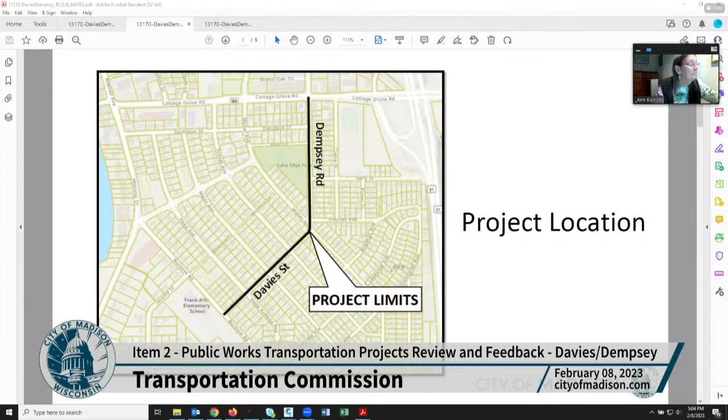Hello, everyone. I will go ahead and share my screen. Can you confirm you see my screen? All right, we do. Hello, everyone. My name is Aaron Canton. I'm a designer with the Streets and Paths section in engineering.

Today I am looking for your review and feedback for the Davies Street Dempsey Road reconstruction project that City Engineering has planned for this summer, 2023. The project is on the east side of town. You can see here the project limits on Davies Street from Buckeye Road to Maher Avenue, and then Dempsey picking up from there, from Maher to Cottage Grove Road. This is a rural to urban project. It is a full clean slate. You can see some existing images of Davies and Dempsey here.

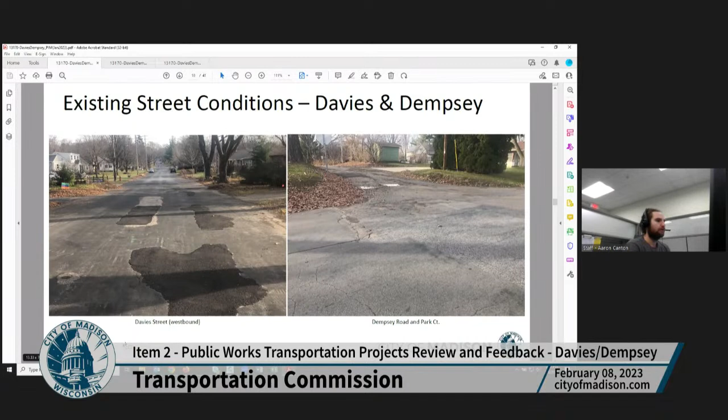Existing width is between 32 and 36 feet. Pavement's in pretty rough shape, just pavement and grass, no curb and gutter, no sidewalk throughout. This project has been in the planning mode for a few years now, I think probably about 3 years. There's been public meetings going back to 2020. We had feedback from previous meetings and had a direction forward for a proposed design, which we brought to the public just a couple weeks ago. We had some really good feedback there, and today we're presenting to the commission.

So first off, as is now a common thing for these types of projects, we have the approved complete green streets guidelines to guide some of the decision making. Just a little background on Dempsey Road and Davies Street: it's classified in the CGS guideline as a neighborhood street, meaning a little different than neighborhood yield street, because we need two travel lanes where two drivers can pass without needing to stop.

This is a transit route. It is today and will continue to be so with the metro redesign. So we definitely need to make sure that we accommodate buses well throughout.

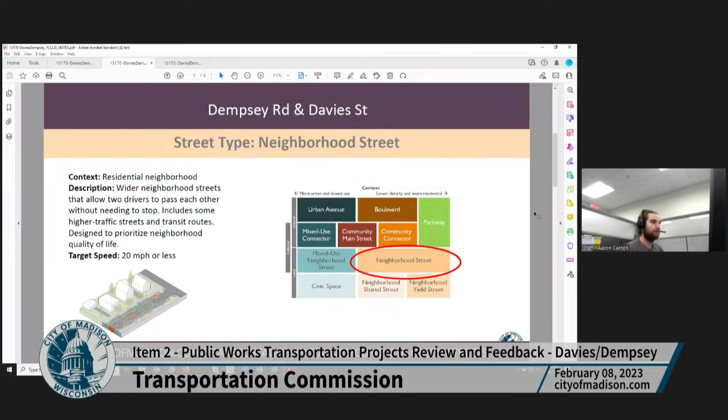One of the main overlays from the CGS guidelines that impacts this project is that a majority of Davies Street and Dempsey is on the all ages and ability bike network, as a large part of it is on the Monona Lake Loop. So we need to make sure that we have a safe, low stress bike option on this street that ties in well with the rest of the Lake Loop.

And otherwise, this stretch does connect some bigger elements. You've got Allis Elementary School here off Buckeye, Pinney Library off Cottage Grove, so it's a common thoroughfare through this neighborhood.

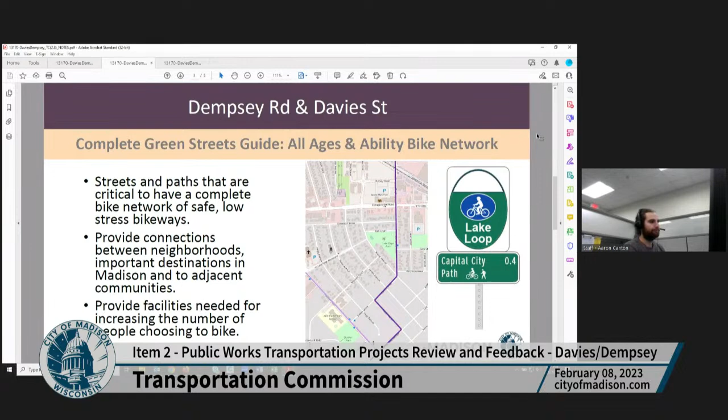Getting right into it, this is the proposed cross section that we'll be looking at today. Again, this is a rural to urban, so a clean slate. What we're proposing is a 26-foot wide street, the width of two 11-foot travel lanes plus the gutter pans, with little wider travel lanes here given that it's a transit route. I'll mention that this also requires removal of all on-street parking on the street.

Right now the street has more or less continuous on-street parking on both sides, except along Lake Edge Park. So that would be removed to fit in all this.

So the 26-foot wide street, face-to-face, with a 5-foot sidewalk, pretty typical on the east side of the street, with a varying terrace width - a grass terrace between the sidewalk and street of 4 to 8 feet. And then on the west side, proposing a 10-foot shared use side path for bikes and pedestrians, giving that all ages and ability bike network and pedestrian facility, with a varying 3 to 5 foot grass terrace between the path and the street here.

The grass terrace, as you'll see in the exhibit, varies quite a bit, and it's a tight corridor in terms of grading and tree impacts. We're really trying to squeeze this through while minimizing impacts as much as possible, so trying to maintain a 4 to 5 foot grass terrace as much as possible, but narrowing it where needed to save specific trees or address grading issues.

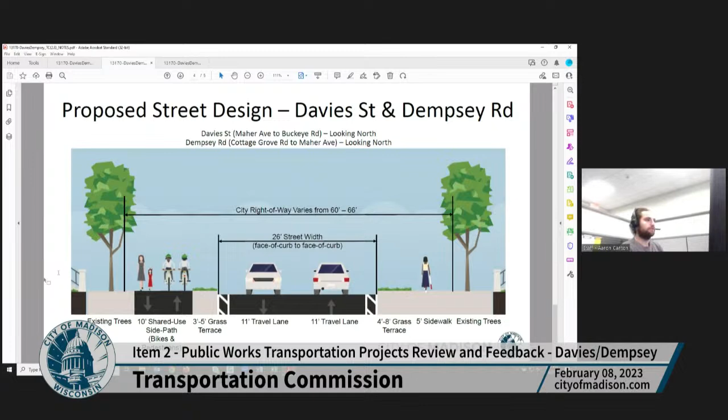This is kind of a recap of some of those notes. Just for background, some of the previous designs looked at in previous years had a wider street with travel lanes and then on-street bike lanes - both painted bike lanes and buffered bike lanes - plus sidewalk on both sides. These designs had a much wider footprint, so they had a lot more impacts in terms of tree loss and grading impacts, needing retaining walls and such. So this design really allows us to narrow things up and avoid a lot of those impacts.

The narrower street also accommodates the two travel lanes but helps to create some traffic calming. We'd have a wider street if we had the on-street bike lanes. And given that it is a transit route, some other things like speed humps and traffic circles wouldn't be allowed, so a narrow street works there. The side path obviously provides that all ages and ability bike facility on a transit route.

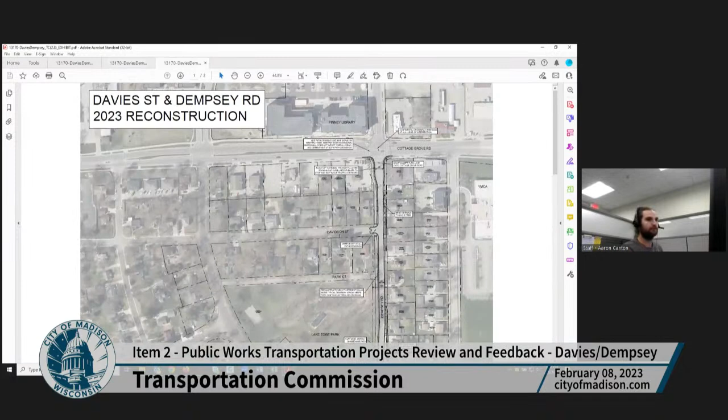Now getting into the proposed exhibit - here is an overview. Buckeye Road here, Cottage Grove here. We'll start on the north side.

So this path proposed on the west side of Dempsey would continue the existing off-street path north of Cottage Grove, reworking this intersection a little bit, mainly on the southern side. Right now there's a diagonal bike crossing with a bike-specific signal across Cottage Grove.

We're proposing to leave that diagonal crossing and add a westerly side crossing to the path. That would likely be the more common crossing, but keeping the diagonal crossing allows good access to the bike lane on Cottage Grove, and it doesn't impact overall delay since it's all in the same phase. So we're keeping both, painting both crossings with green paint, as well as redoing all 4 legs with continental crosswalk markings.

Continuing south along Dempsey, here there's a little bit of a wider street section, maintaining the existing left turn lane for northbound Dempsey onto Cottage Grove, with 2 travel lanes.

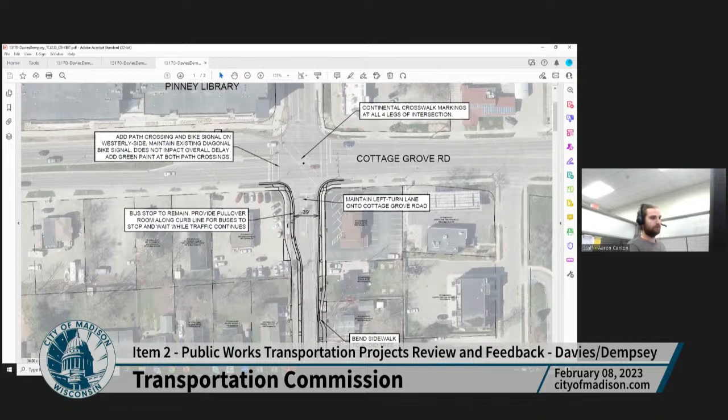This is a bus stop and will continue to be so, a timed stop bus stop. We need room here for buses to pull over and wait along the curb line to sync up with their route, and for buses to sit and wait while traffic continues. It's kind of tight here, maximizing the right of way, but this works to provide all the lanes needed, a path on the west side, sidewalk here, redoing a little bit and bumping that existing curb line out.

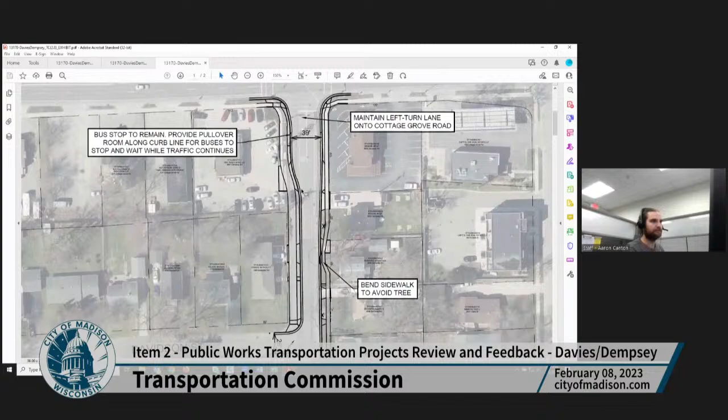Continuing south, we get into our regular narrowed cross section, 26 face to face, with the path on the west side and sidewalk on the east side, bending the sidewalk around existing trees to avoid those impacts.

Here there are a lot of street crossings with unimproved streets, so we're setting those up. Some of the future streets here have future projects planned, so we're going with a standard 26 face-to-face width, but those projects, when Davidson is reconstructed here, would be a decision made then.

So at all the street crossings along the path, we would have green paint.

As we continue south, here's Lake Edge Park, a pretty nice big park in the neighborhood. At Park Court, I'm proposing keeping the path continuous through here and creating a driveway opening into Park Court. In this area of the park, there are some pretty large mature oak trees and steep grading, with some small retaining walls. So we're keeping things towards the east here, aligning with that existing edge of pavement to avoid impacts to the trees or walls there.

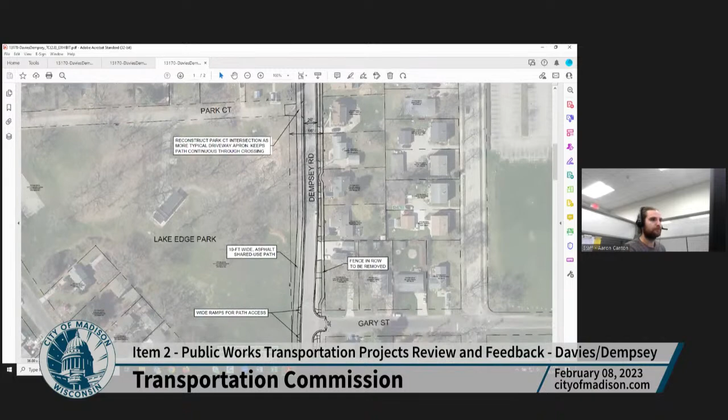As we continue south, we shift over to the other side, shifting everything to the west, with a little bit of an alignment curve through Gary Street. This is because there's some steep grading on this side of the street, with some existing walls there as well, and softer grading on the park side.

Here at Gary, we have a little bit wider than usual ramps to allow for easier access for bikes getting on and off the path from Gary Street. The Lake Edge Park sign and ornamental crabapple would have to be removed and relocated for the path, since it's in the right of way currently. We've already discussed this with Parks.

Again, the sidewalk here is following that existing edge of pavement. There's some steep grading here, with potential wall replacement or reconstruction at one of these homes.

As we continue south, everything gets a bit more centered in the right of way as we get to this pretty funky 5-way intersection, which today is kind of a sea of pavement. Maher Avenue, you can see, just continues through, so we're proposing a pretty big geometry change here.

This north leg of Maher, we're proposing to really tighten that up and push it to the north so that it comes in at a perpendicular angle into Dempsey Road, a lot different than it does today. You can see that existing stop bar. So that northern leg of Maher would line up pretty much as a 4-way intersection with Pinchot Avenue, slightly offset, but that would really improve visibility for all cars and cause side street traffic to slow down.

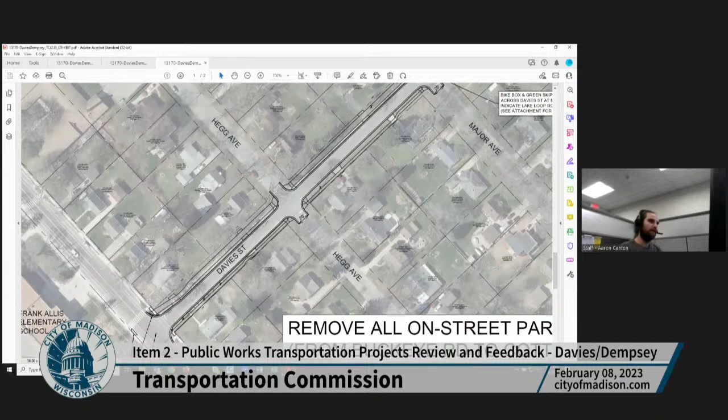Continuing on towards Buckeye, one more street crossing at Hegg Ave. The path continues all the way to Buckeye, and it just makes sense to bring it all the way. We'll want to make sure there's at least sidewalk there, since it would be too hard to transition to bike lanes and sidewalk at this point. This really helps keep things narrower and avoid tree impacts on both sides.

As we get to Buckeye, the path bends a little around a mature oak in order to save it. Then a new path ramp opens onto Buckeye Road near the elementary school, with a new ramp opening on the other side of Buckeye to line up with the path.

Definitely looking for feedback, but we were thinking of keeping this existing continental crossing and adding this path crossing here, marked with green paint, so people would have the option. Could see a lot of kids biking to the school, taking the path and continuing on that path crossing, opening here onto the sidewalk to access the school.

Also making sure there's some sort of green skip crossing to make getting from the Buckeye on-street bike lanes onto the path work well, and remarking all three legs of this intersection with continental crosswalk markings.

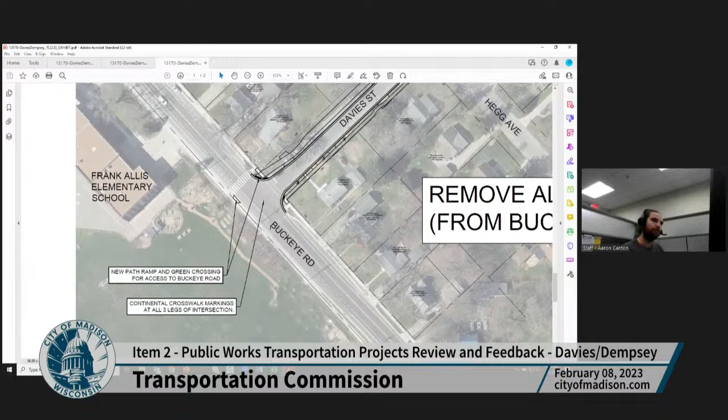Again, this design involves removing all on-street parking along this whole stretch of Davies and Dempsey, and there are some tree removals still. It's a pretty wooded area today, but quite a bit less impact than some of the previous designs. I think that pretty much sums up the presentation.

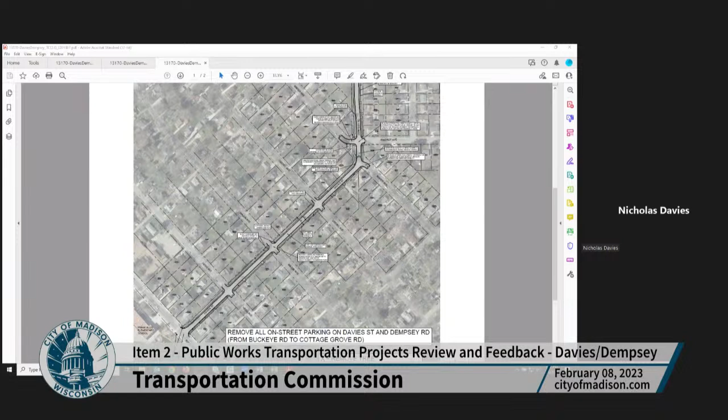Thanks. Thank you. Does anybody have a question for the registrant? Okay, I'm seeing no hands. Who else do we have, Aiden?

Next is Katherine Weir of Davies Street, Madison, Wisconsin. Opposes and wishes to speak.

Hello, thank you for the opportunity to speak. I just wanted to also say thank you to the city staff who have spent a lot of time around this design. I wanted to first say that I share the same goal as city staff and others I've heard at the meetings of making this a safer location, a safer street for cyclists and pedestrians.

For reference, I live on the corner of Davies and Major Avenue, on the westerly side of Davies. So where Aaron was showing the turn onto the bike loop, onto the lake loop from Davies onto Major, that's exactly where our house is, on that corner. We've lived here for a little over 2 years now, so I have seen a lot of bikers and cyclists and have really seen how this path functions, or how the area functions, I should say.

My concern is that I have not seen or heard information to back up that a shared use path is the safest option for cyclists on this street. I utilize the paths throughout the city with my own family. I have 2 young children, so I understand that paths can often be the safest option. However, here the path will be in the place where a sidewalk would typically be.

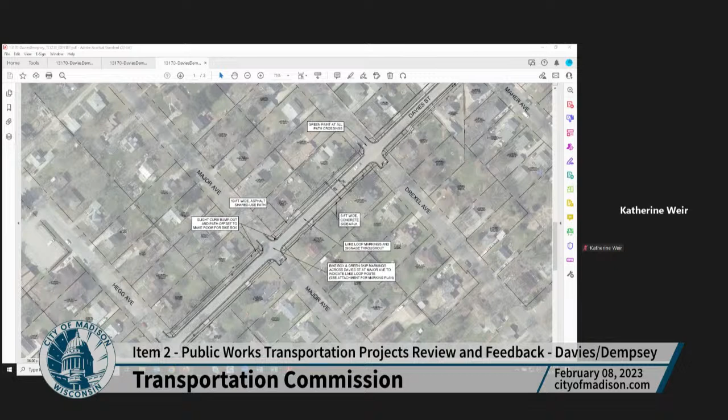Thank you very much. Does anyone have questions for the registrant?

Okay, seeing no hands. Who else do we have, Aiden?

So that was the last registrant wishing to speak, but the other registrants are: Kelly Debink of Schofield Street, Monona, supports and is available for questions but does not wish to speak. Kyle Hansen of Helena Street, Madison, supports and does not wish to speak. Kevin Lueck of North Ingersoll Street, Madison, supports and does not wish to speak. Connor McCullough, Fisher Street, Madison, supports and does not wish to speak. Nick Rampa, Harding Street, Madison, supports, does not wish to speak. And lastly, Connor Stone of Thorpe Street, Madison, supports and does not wish to speak. Okay, just checking. Thanks.

So, comments or questions for Aaron, or I saw Renee on here as well, and Yang, and I think we also have a couple other staff. Darren, go ahead.

Thank you for this presentation. I really appreciated it, when I first saw it I was like, oh, now I have to dig out the Complete Green Streets Guide and see how it connects. So I really appreciated the report that tied it all together and saved me a whole lot of time looking at that. I do have a question about all of the street crossings on the shared use path, seeing how this connects a library, a park, a school. Has there been any consideration to prioritizing that path as it crosses those streets through raised crossings, to give a little bit of a signal, if it's going to be that wide, just to let people know hey, something is going on, and then also the lake loop thing. So that is just my question as it goes along that shared use path.

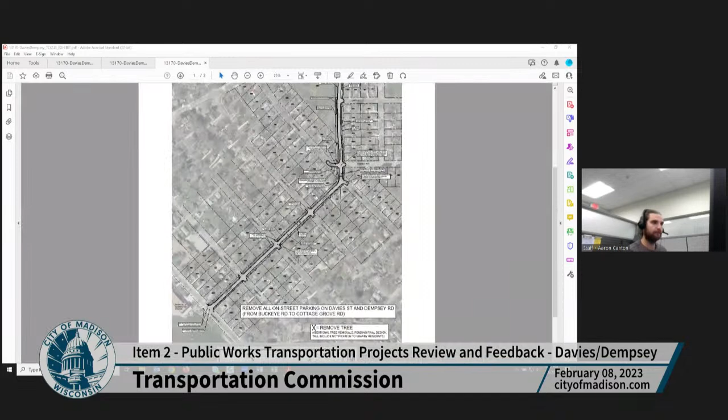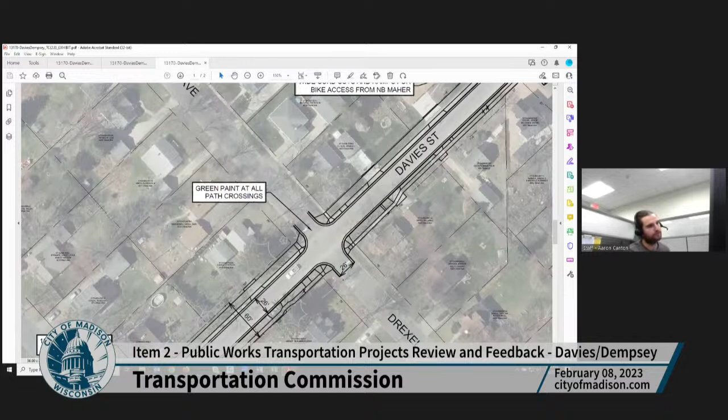Yep, definitely. So doing raised crossings, kind of like what was shown at Park Court, though that is a little bit different street. So definitely something that we've heard feedback on and have discussed some. They're just always tricky to put in. It involves more storm sewer, more concrete, and more cost, so something that's difficult to do everywhere. Some of the intersections are also pretty tight. Like when you have this kind of side path crossing, ideally to fit it in and make it not look really weird, you'd want that path to be offset a bit onto that side street, and there's not a ton of room to do that given the right of way here. But I think it's something we can definitely look to do more, and look at some other potential crossings where it could work. I think on Maher, this leg is one where it might be a little more feasible, though you do have kind of a tight closeness with that driveway here. But yeah, it's an added cost and has difficult grading, involves a lot more storm sewer usually. But if the commission wants us to take a closer look at where it could be fit in, I think we definitely could.

Yeah, I mean, I appreciate the added cost. I just think of library, school, park, lake loop. They're all the things we're trying to do, all ages and all abilities bike path there, that it's something that really -- I understand trying to stretch dollars, but these are probably little kids' lives that are crossing there. So I just kind of look at that a little strongly.

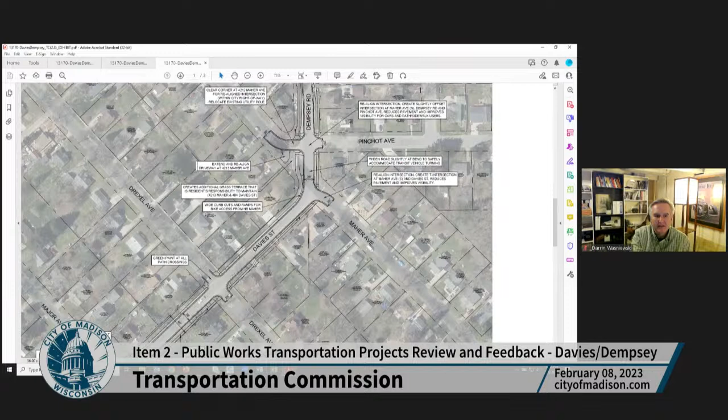Okay, so perhaps look at that where feasible, or we can hear other thoughts from other commissioners as well. Is that all you had then, Darrin? It is, thank you. Okay, thanks Aaron. Harald, go ahead.

Yeah, thanks, thanks Aaron for presenting this. I mean, this overall looks really good to me. It will be a great improvement to the current very bumpy pavement, no sidewalks, giant puddles, ice in the winter. So I'm really looking forward to this actually happening, and I think the design makes a lot of sense. I think I'm in agreement with Darrin, a continuous pathway would be good.

I don't think it's absolutely crucial here because the cross streets are mostly stop controlled and also not super high volume. Some of them don't go through all the way, so there's probably not a ton of turning movements. But since this is such an important bike connection, I think defaulting to the continuous path whenever possible would be good. It would be good if you could investigate that more.

Couple questions. With the lake loop routing, as you said, it's kind of awkward right now. All the intersections look the same. I'm not totally sure why the routing goes the way it goes right now, like why it makes that left turn where it does, when other possible routings would be possible. So I was wondering if there's any reason why it goes on Major right now.

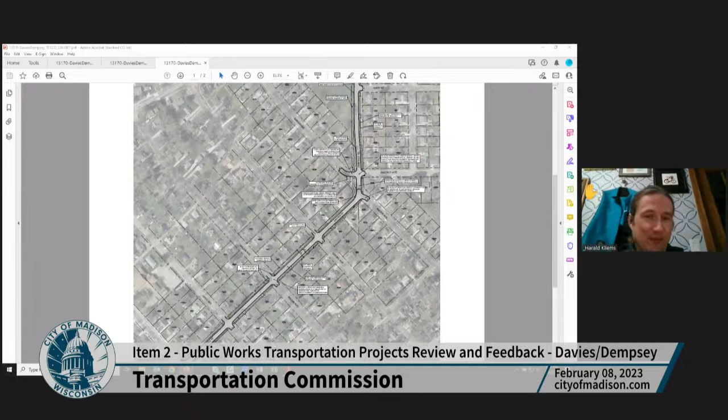Okay, thanks for the history there. Harald, other comments? Yeah, I think that's helpful, because if there had not been a good reason, I would have suggested just assessing, like let's pick where it makes most sense in terms of the intersection. Especially with the now reconfigured Maher, which maybe sees somewhat fewer cars now since you can't go straight through anymore. But I think this is all fine.

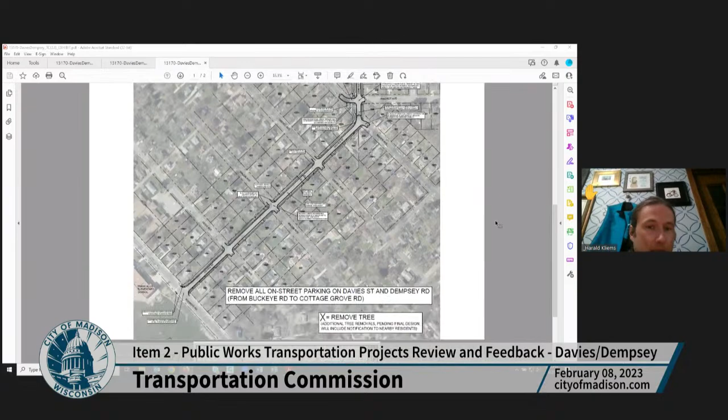I think for that intersection of Major, to facilitate that turn, I think looking very closely at the geometry there, and making sure that when you turn right from Major onto northbound Davies, people can make that turn without getting into trouble, because the path is only 10 feet wide, without going too far into the other side and possibly having conflicts with oncoming cyclists. So just looking at that closely is good. But I like the markings, I like the bike box.

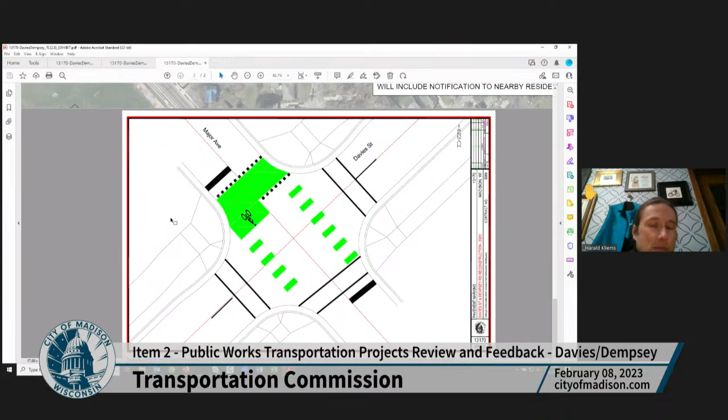Could you go to the intersection with Cottage Grove?

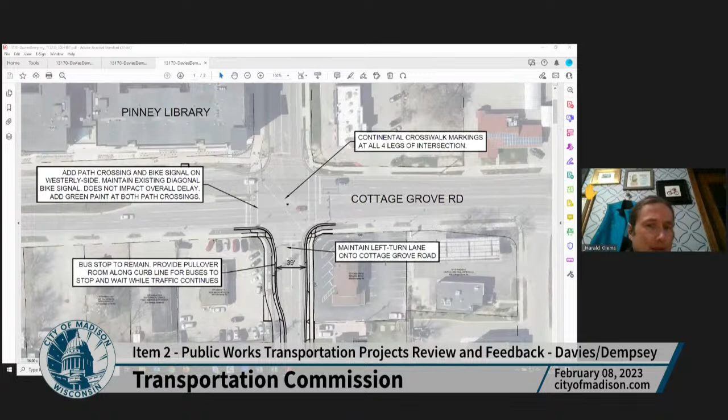Okay, so you explained us with the bus pullout, or the bus needs to be parked there, and you have the left—do we need that left turn lane at that intersection? Maybe tying into that, I'm thinking about the signal phasing here, because as you said, there's the diagonal crossing, which I think is its own phase. And then if you have left turns onto Cottage Grove, is that going to be a protected left? Is that the advantage of having a dedicated left turn lane? Because with the buses there, I think you need a pretty wide right of way, and I want to make sure that all works well.

I wonder if maybe a traffic engineering person could chime in about the need for the left turn lane and the signal phasing. I know Jerry Shippo is guiding on this and he is not here tonight, he's at board. Is Jeremy Nash or Yang available? Could either of you help? Yeah, I'm happy to speak up about that.

This is Jeremy Nash. Last time I talked to Jerry, I believe the bike crossing was its own phase in the signal, so everything stops and then the bike signal goes. His intention was to keep the diagonal crossing and the north-south crossing in its own phase. I don't know if I can speak to removing that left turn lane, but I know Jerry planned the signal phasing that way.

Okay, yeah, I think overall this is probably just fine. I wonder about where the signal heads go for that crossing... never mind. Looking at the need for the left turn, if we don't need it, I think it would be better to have a dedicated bus pull out, because when the bus is parked there, people have to go into that left turn lane to get around it, which seems slightly awkward. It's a little weird with the aerial in the background, but everything is shifted over. We looked at the two through lanes, left turn lane, and bus pull out separately, so the bus could be pulled curbside and out of the way. There would be a little spillover naturally, but it would largely keep southbound traffic out of that left turn lane.

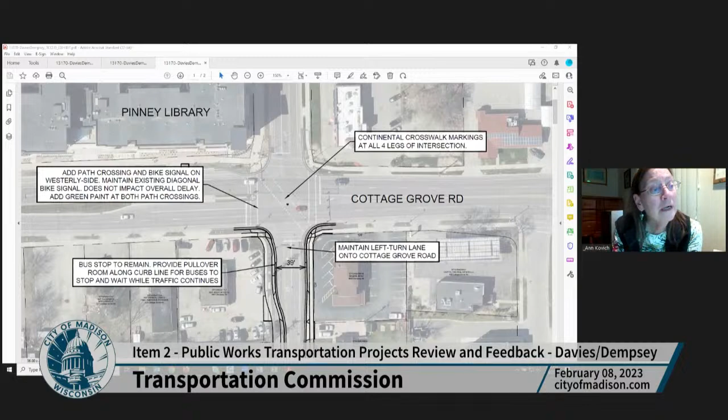Thanks, Alder. Other comments or questions? Looks like a lot of work has gone into this over an extensive period of time. Other comments or questions? Aaron, you've heard a lot of feedback, mostly about raised crossings, which it sounds like you'll try to accomplish where you can, but it may not be feasible in every instance. Would that be correct? Yep, that's correct.

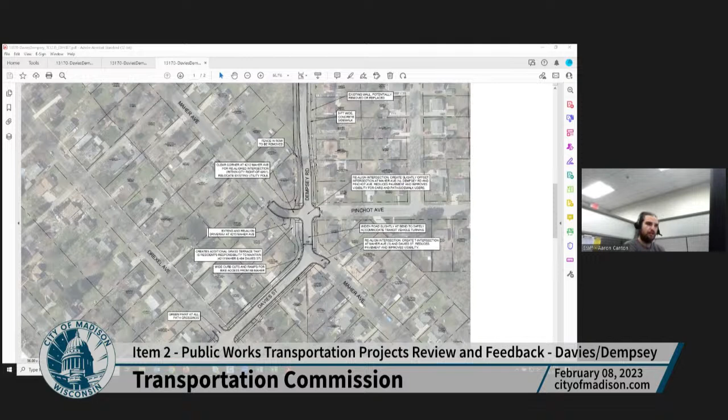Sure. So as discussed, this project has been in the planning stages for a few years now. Before I was the PM on it, there was another designer. There were two public information meetings, one in December 2020 and then one in January 2022, about a year later. Hearing that feedback, the project ended up getting pushed to this year, 2023.

We took in the feedback with this proposed design with the side path, and we hosted a public meeting just a couple weeks ago at the end of January. It was a virtual public meeting, as were the ones before it, held in the evening.

We sent out a pretty large postcard mailing to the people on the street and the surrounding area, and also sent it out to some of the Madison Bikes groups. We had about 60 people at the public meeting and about an hour and a half of Q&A—so really quite a lot of engagement, and one that people had already been pretty aware of. All in all, really good engagement.

We also had a project survey with some more general questions and comments from folks. That survey actually ends today, so I'm looking forward to hearing more responses on that.

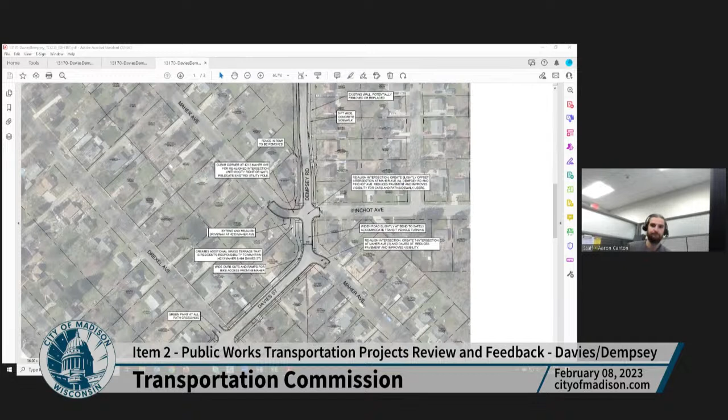Excellent, that sounds very good. And where was that public meeting held? It was virtual, yep.

Okay, thank you so very much, I like to hear that. And I'll just add, since Aaron joined the project at the end, but I was at the other meetings—they were all well attended. We did do a survey at the first meeting as well, so I feel like we've captured a lot of input, and a lot of the ideas you see tonight actually came out of those meetings. I think it was really quite a good process for this one.

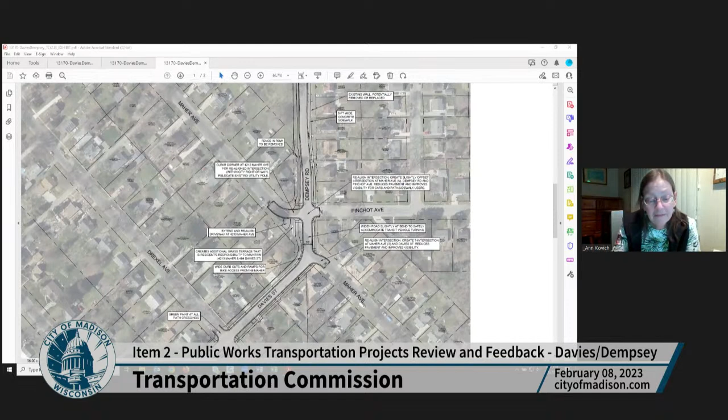Okay, so let's move on to item number 3, the Transportation Annual Report. That would be Tom Lynch. This is one of those unusual situations where we have something required by the Department of Transportation ordinance to go to both the Transportation Policy and Planning Board and the Transportation Commission. So Tom was at the Transportation Policy and Planning Board on Monday and is here at TC this evening. Go ahead, Tom, and welcome.

Thanks, yeah. Hold on for just a second. Thank you—I'm in my kitchen, and things were about to happen in my kitchen, so I thought I'd postpone them for just a little bit.

I didn't actually realize that I was supposed to do this report until about a year into my job, but it's actually become one of my more fun things to do. I typically do it over the Christmas period, and it's kind of a reflection on what has occurred and also where our transportation is going. I like to start the report with the trends.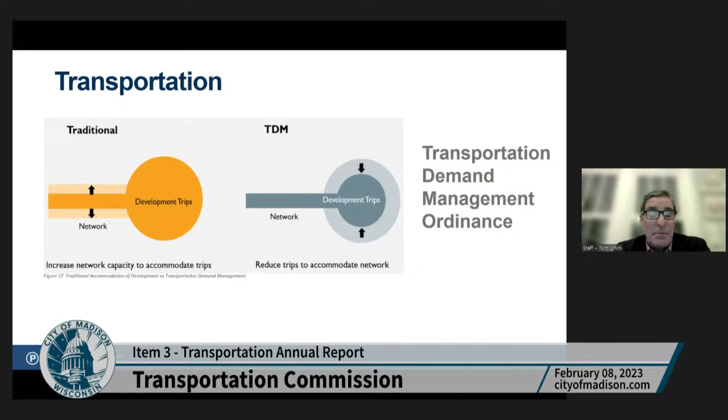Also in transportation, we have been working with engineering to develop a methodology to program projects that relies on more than just pavement condition. The methodology includes a high injury network, the ability to add pedestrian bicycle facilities, and the condition of utilities underneath the street, such as water and sewer.

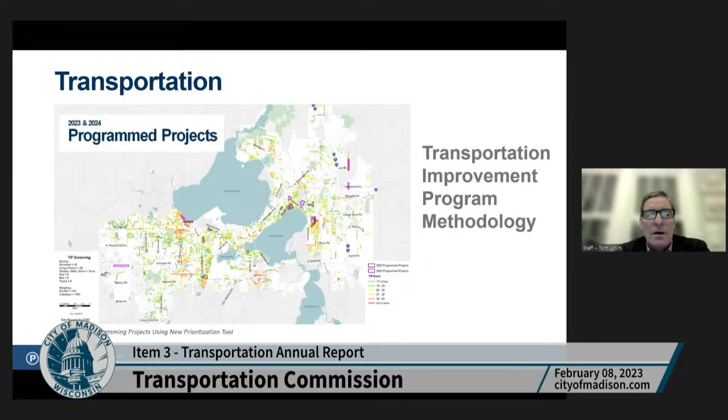A scoring system was used, illustrated by this graphic. The reds are showing streets with high need and the greens are showing streets with lower need. The purple and gray are the outlines of the '23 and '24 program projects. This methodology will be used in the projects you see for the TIP for the current year, and it provides a better way to evaluate our reconstruction needs more holistically.

In transportation, we started the Amtrak location study. What we thought would be a public meeting with maybe 50 people - in fact, I remember telling the setup crew to just put out 20 chairs because we don't want to look foolish if not many people come.

Lo and behold, probably the in-person had between 100 and 200 people attending. Here you can see the Amtrak meeting before, probably 10 or 15 minutes before it even got started. We had 700 people that wanted to join the online version just after the in-person. So it was a huge success. It also showed that we really need to treat this as a big deal and have better staffing and better IT support when we do the future things.

If we look to traffic engineering, the Vision Zero Action Plan, that was a big deal. That was passed in March. And then this was the first year of Safe Streets Madison, which was a big deal for the Transportation Commission because you had to go through that and approve all those projects.

Traffic engineering, complete green streets. This is really going to change the way we design streets for decades. This is in the ordinance, and an illustration of how this is going to work is what you just saw prior to this agenda item. I think ours is perhaps the most complicated that I've seen in the country, but also is kind of neat because it includes land use context in the typology. So it's not just whether you include bike facilities or pedestrian facilities, but it also acknowledges that there's a land use context, and how does that street fit into that?

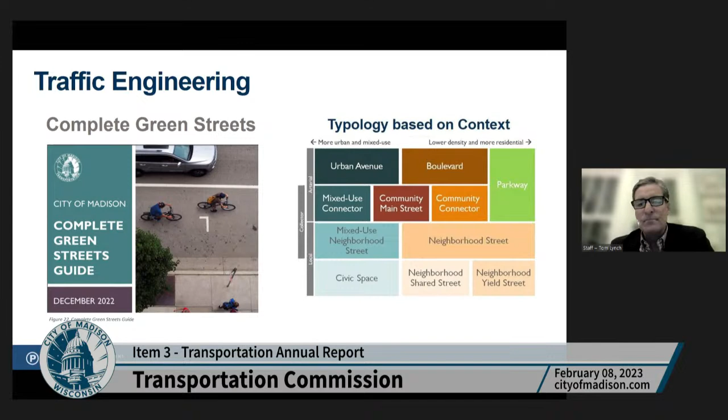Metro Transit, the East-West BRT, the environmental document was approved. There were 2 bid packages. I think one of the bid packages had 1,400 plan sheet pages. That's just a huge lift. Our consultants did a lot of work, and then we did a lot of work coordinating with them. The bidding of the early works in the main bid package, and then a bus order for 46 buses. And then we had the groundbreaking work some of you were involved with.

The Metro Transit network redesign. This occurs just once every 25 years. It's really hard to do. I remember in 1998 when this last occurred, and this was a huge lift, a lot of work. It will be interesting to see because June 10th, you will ride one bus, and then June 11th, you'll be riding a totally different bus. I remember reading about how Houston changed all the bus routes overnight, and lo and behold, we're going to be doing that too, June 11th.

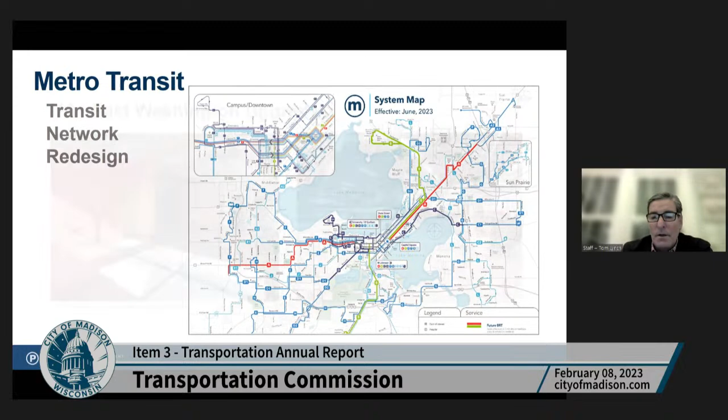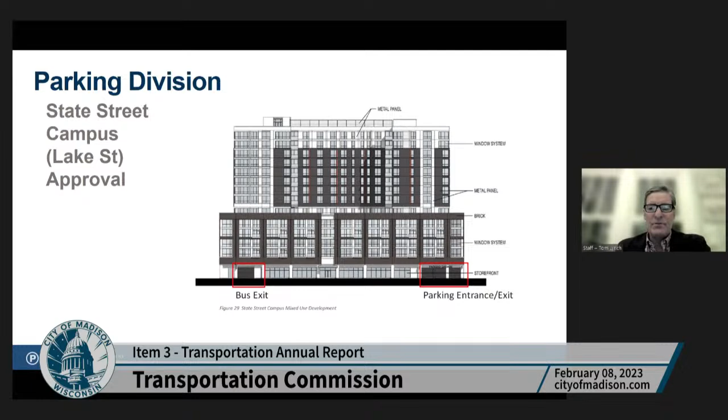Parking division, the State Street campus redevelopment, which includes a Lake Street. So this includes a reconstruction of one of our older garages that's 60 years old, but it hopefully will also include an intercity bus terminal. So we're excited about that. The zoning was approved, as was the developer contract. So we hope this is able to move forward.

Then the parking division, that was also somewhat in the background, but it was still important. We had a lot of the PEO vehicles stored in police facilities downtown in the Fairchild lot. All of those were relocated, relatively rapidly, to the Wilson Street garage. So they just changed their operations, as well as the downtown PEOs changing their base of operations. And then we've also been getting ourselves ready for the future interim home. The Town of Madison facilities have been transferred to the City of Madison. We hope to house our PEOs, all of the PEOs in the districts there, and Stephanie, who is on this meeting, believes that we'll be able to move late March or maybe early April. So that's an exciting thing.

Tom, do you want to mention Stephanie's new role as well?

Yeah, I didn't think I was supposed to staff this meeting, but I saw that she's co-host. So, Stephanie Cox, why don't maybe you could turn on your camera? I don't know if you, is she? There she is. Is she there? Okay, yep, there she is. Yep, I'm gonna stop sharing so that Stephanie can.

So we're excited. Stephanie has been working with the PEOs for over a decade, maybe 15 to 20 years. Was recently with traffic engineering, and she'll be our new parking manager. I think she's back from vacation, has started for about maybe a week, and look forward to seeing all the things she's going to do. She brings a lot of energy. And so some of us, if any of us are tired, I'm kind of tired, well, she's going to come in and just keep that energy going.

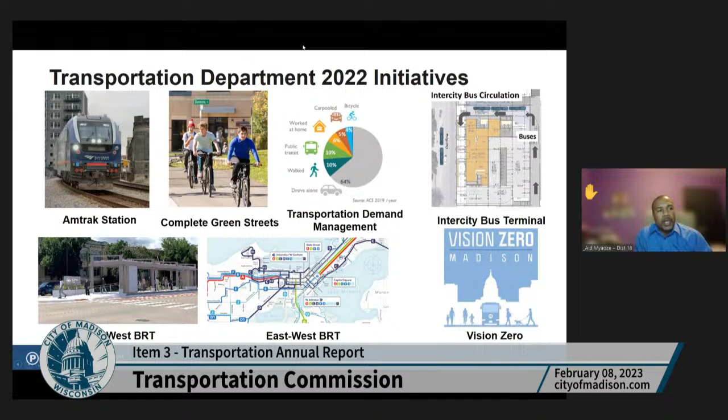We talked about at the beginning how there was traffic on East Wash, but also that has gone down. But the traffic on the Beltline has increased due to the extra lane added. Do you think that might be because people are diverting toward the Beltline? You talked about traffic being diverted down certain streets to alleviate traffic.

Yeah, there is some diversion, but I don't think it's necessarily relieving East Washington. Modeling is kind of a strange thing. For instance, we actually modeled what it would take to reduce John Nolen Drive to 1 lane in each direction, and we thought 10,000 cars would leave John Nolen Drive if we did that. We thought, well, it's all going to Park Street, right? Because that's what you would think. Well, no, actually only 500 cars go to Park Street. It goes in like 150 different directions.

So I don't think the increase in volumes on the Beltline is pulling traffic directly from East Washington, but I do feel like there's 150 different choices that people are making all around that are eventually just adding about 1,500 vehicles to the Beltline.

Okay, another question I had is that there was a fatality, I'm not sure if it was due to the accident, but on CV and over on Packers. I just wanted to pick your mind. I know CV belongs to, I think, Dane County, more or less Madison. Is there any way to partner with Dane County to ensure, I don't know if we've got anything in the making, as far as repavement or to address congestion, especially in the morning?